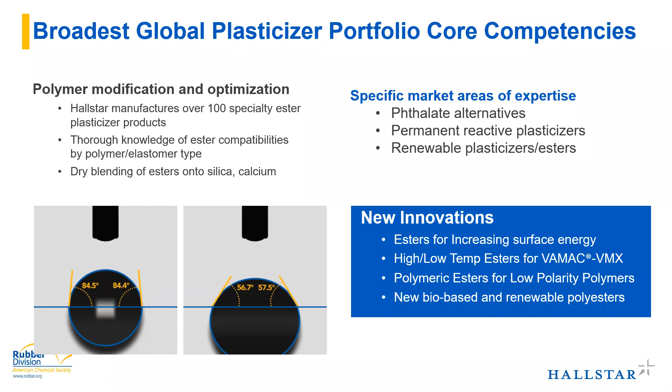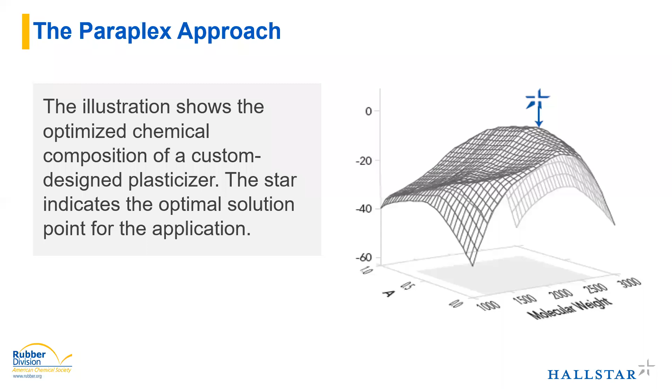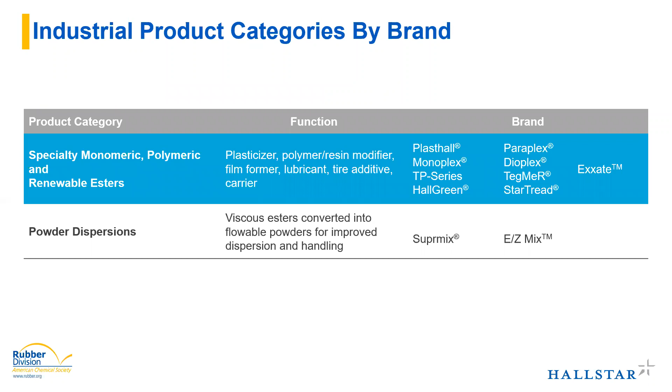And this chart just sorts some of our industrial products into chemistries, showing their functions and the corresponding brands that fall into these categories. This is just to give you an idea of the brand names at the core of our business, some of which will show up as examples in today's presentation. In the elastomer market, we serve various applications in automotive, oil and gas drilling seals, print rolls and blankets, conveyor belts, tires, and wire and cable industries. We have a long history in and have developed a lot of knowledge about elastomer modification.

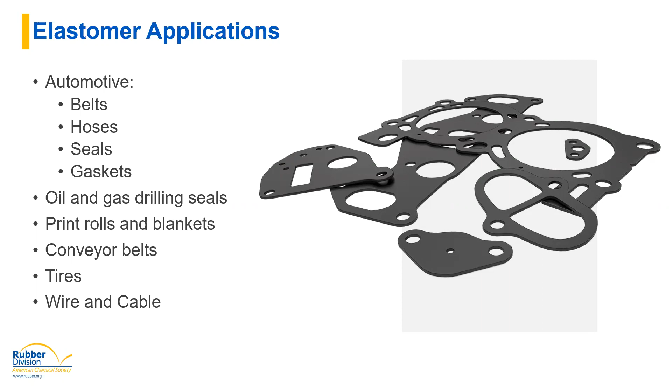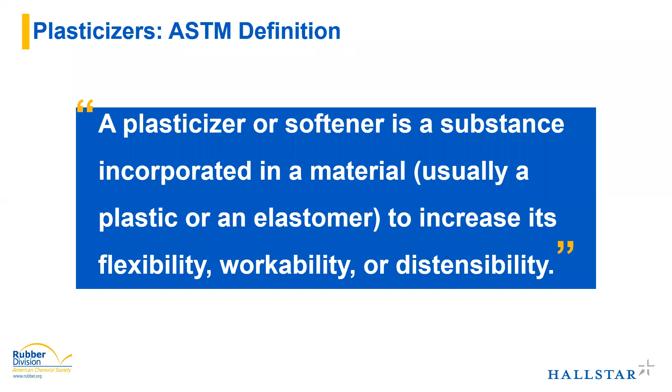So now it's time to get into the world of plasticizers. First of all, what is a plasticizer? ASTM defines a plasticizer as a substance incorporated into a material, usually a plastic or an elastomer, to increase its flexibility, workability, or distensibility. Plasticizers can function as process aids in low loading levels or compound property modifiers in higher loading levels. As process aids, they reduce the viscosity of the mixture for greater ease of processing in the form of lower temperatures and increased flow, as well as lubricating the mixture for cohesion of the uncured compound and reducing adhesion to both mill rolls and molds. Due to the low loading levels, however, they don't significantly alter the properties of the compound.

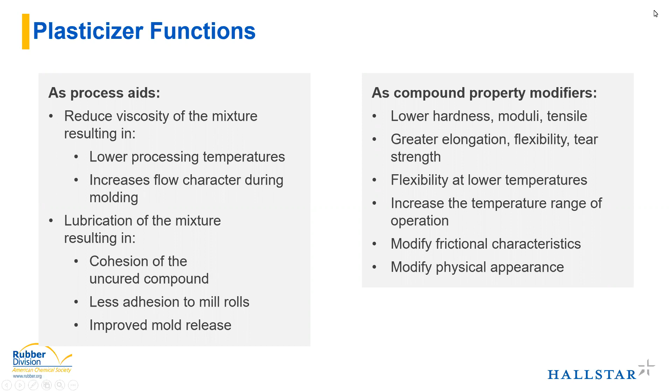However, as compound property modifiers, plasticizers improve upon various properties such as tensile, hardness and modulus, as well as flexibility, elongation, and tear strength. Furthermore, they enhance flexibility at low temperatures, increase overall temperature range of operation, modify friction, and can even change the physical appearance of the compound. So you may be wondering why we at Hallstar have a keen interest in ester plasticizers. Well, they provide distinct advantages to polymers, such as enhanced low temperature performance via depression of glass transition temperature, and also allow for improved processing and resistance to various fluids.

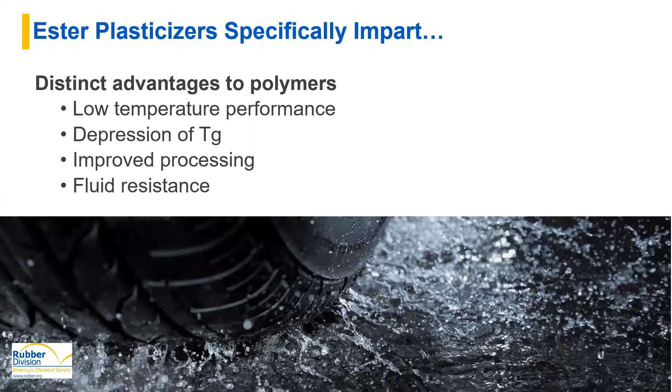Polymers are generally softer at high temperatures. This is because the polymer, when heated for a prolonged period of time, can break down and create lower molecular weight byproducts that act like plasticizers in the system. However, when heat is removed, the polymer modulus quickly recovers. So drawing off this concept, internal and external plasticization were invented in an attempt to retain the lower modulus of the polymer at lower temperatures.

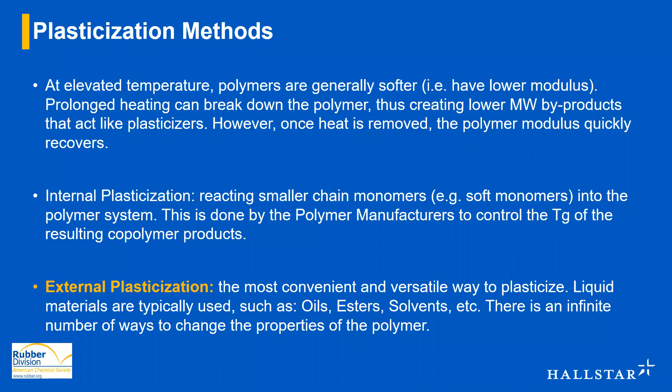Internal plasticization is not very common, but it does happen during polymer production, in which polymer producers chemically react plasticizers into the polymer chain to control the glass transition temperature of the resulting copolymer products. External plasticization, on the other hand, is much more common, as it's the most convenient and versatile method. This is when plasticizers, typically liquids like oils, solvents, etc., are added during the compounding process. This method allows for infinite ways to change the properties of the polymer.

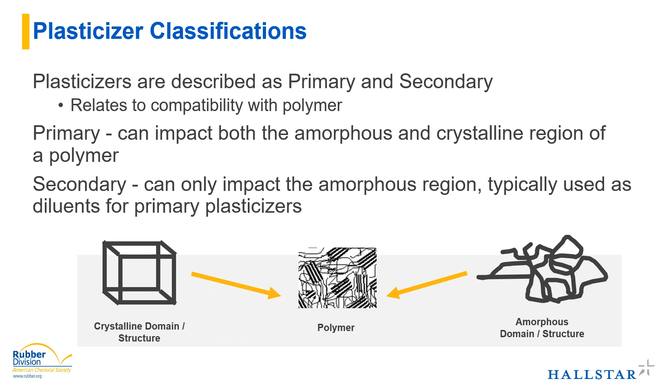So as you can see in the graphic below, polymers can contain both crystalline or ordered and amorphous or disordered regions, depending on how the chains pack together in space. The compatibility of a plasticizer with a polymer is impacted by the way the plasticizer fits into these regions, and this is what classifies plasticizers as primary or secondary, as you saw in the previous slide. A primary plasticizer can permeate both regions, while a secondary plasticizer can only impact the amorphous region of a polymer. Secondary plasticizers are typically used to dilute primary plasticizers in a formulation.

So now we know that plasticizers take up space in different regions of a polymer, but you are probably still wondering how they actually work. Well, there are four main plasticization theories. The first one, the lubricity theory, states that a plasticizer molecule acts as a lubricant between polymer chains. So as a polymer is flexed, the smaller plasticizer molecules glide back and forth between the chains. The second theory is known as the gel theory, which claims that plasticizers break up various gel sites in a polymer, or sites formed by a gel of weak attachments causing polymer stiffness.

The third and most widely accepted theory is the free volume theory. This states that plasticizers add more distance or free volume between the polymer chains, which accounts for the lowering of the glass transition temperature of the polymer. The mechanistic theory, the fourth theory, isn't really its own idea, but it kind of fuses and explains the other ones. This theory asserts that since polymers and plasticizers are not bound to one another, the plasticizer continues to move freely from one polymer location to the other, allowing for greater overall flexibility of the system.

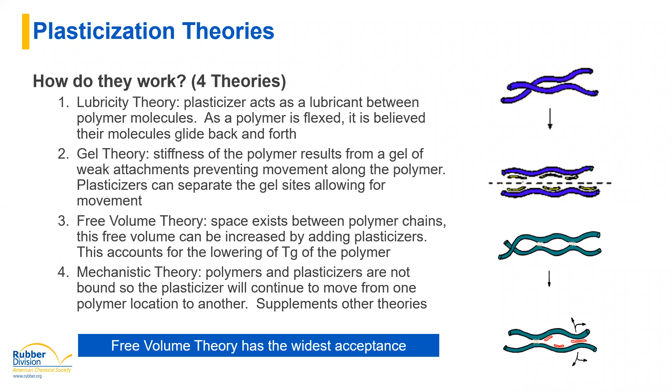So now that Dani's covered how plasticizers work, what their function is out in the world of polymers, how do you choose which plasticizer is the right one for your application? There are hundreds and hundreds of products out there, both ester and other types of plasticizers, and it can be a little overwhelming to try and figure out which is best for your application. There's a number of things to consider when you're looking and narrowing down your choices.

The number one thing that is the most important when deciding on your plasticizer is compatibility. If your plasticizer and your polymer are not compatible, the plasticizer will not stay in your polymer and will either bleed out or be extracted out over time, and you will lose any properties that you might have gotten by adding it in the first place. So that is really the biggest thing that needs to be considered before you look at anything else. Moving on from there, you can look at things like processing. Plasticizers many times improve or can reduce mixing time. They can help to lower viscosity of your overall compound for things like extrusion or injection molding. So that's another portion to consider.

Of course, just original physicals, your tensile properties of your modulus, your tensile strength, your elongation, all the way down to specific gravity of the compound or the compression set. Plasticizer can have an effect on all of those, and often that's your target that you're working towards. And then depending on your application, you may have requirements for heat aging or just long-term aging of the material and seeing how a plasticizer performs over time, and also resistances to fluids. If your compound is going to be exposed to anything in particular, especially for prolonged periods of time, you need to keep that in mind when you're selecting what type of plasticizer, because the plasticizer can really impact everything here.

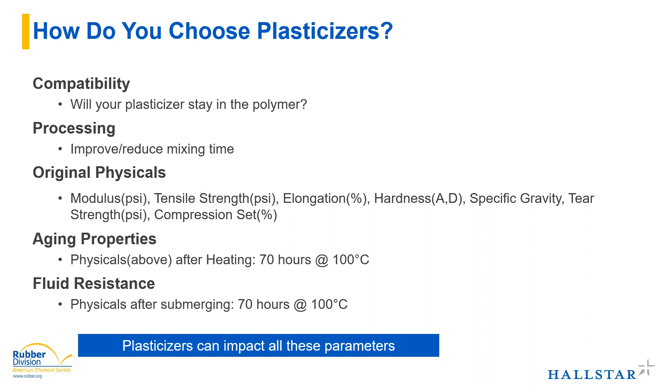So those are all things that you need to think about when deciding. I'm really going to talk a lot about compatibility because, as I said, that's really the most important thing that needs to be considered, at least at first. If your plasticizer and polymer compatibility is correct, then the materials will form a nice homogeneous mixture during the processing, after they're cured, at their resting temperature, and at the application temperatures, if that's different than room temperature.

It's only necessary, though, to have enough compatibility that it will remain in the polymer based on your desired product performance. You probably don't have to worry as much about having perfect homogeneous compatibility if your application is not going to be seeing extreme temperatures or is not going to be exposed to harsh solvents or other fluids that might extract it out. You don't necessarily have to have the exact same polarity between your plasticizer and your polymer to be considered compatible. A lot of other components in your compound could affect your compatibility, so polarity may not necessarily be exactly the same to get good compatibility.

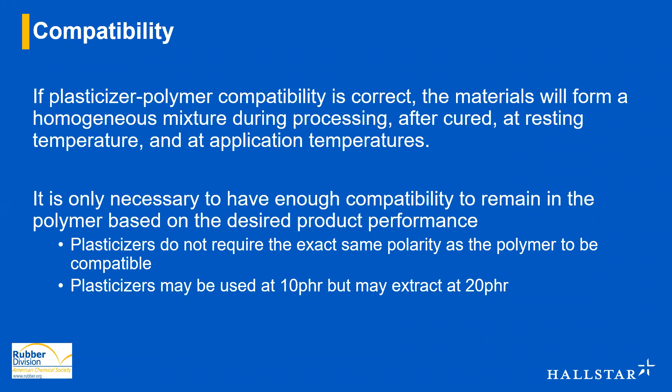And then the numbers given here for loading levels are a little arbitrary, but just to illustrate, plasticizers could also be used at a lower loading level of, say, 10 parts, but if you increase to 20 parts, you might be pushing past that compatibility threshold and you might start seeing extraction coming out. So loading level is also something to keep in mind when you're looking at compatibility.

Going even further, that's more of a relative qualitative guess while we're looking at these materials. But if you want something a little bit more quantitative, you can start looking at Hildebrand solubility parameters. Those are often calculated or tested and published for a lot of common elastomers, and maybe for a plasticizer class, not necessarily a specific plasticizer unless it's a very common commodity material, but you can at least estimate using those numbers. And then going even further, you can get into Small's constants, looking at additive methods of the actual atoms and molecules that are present.

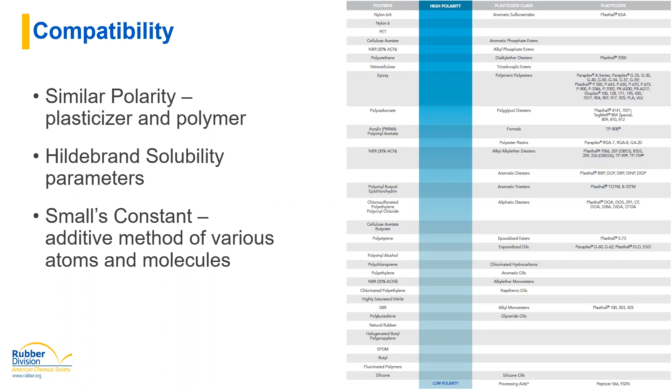Usually, you don't necessarily go that far when trying to decide on a plasticizer. It's a tool that's available, but usually looking at polarity or even solubility parameters is enough to guess at which materials would be the best for your compound, and you can go forward with testing, and usually trial and error is a more effective and efficient way of moving forward than calculating Small's constants, but it is a tool that's available out there.

So how do we calculate and look at polarity? First, if we look at an ester, because oxygen and carbon are the two most common atoms that are used in an ester plasticizer, we look at the carbon to oxygen ratio. There will always be oxygens present. That's what an ester is, that group of those two oxygen atoms in the molecule.

So by adjusting the number of carbons that we have in the molecule, we can adjust the polarity of the overall molecule. If we increase the carbon to oxygen ratio, shown here with the diundecyl on the left with a very long carbon chain versus the dibutyl on the right with a very short carbon chain, that increases your carbon to oxygen ratio and decreases the overall polarity of the ester. When you decrease polarity, you see a higher oil solubility.

Oils are very nonpolar, so as you decrease polarity of your ester, you'll see more solubility in oil. You'll also see a reduced volatility because the ester will always be present. As we decrease polarity, that means we're making the molecule larger, so it's going to be less volatile than a very small molecule like that on the right.

Converse to the higher oil solubility, you see reduced water solubility. Water is very polar, so as you decrease polarity, your ester will be less soluble in water. And then you usually see better low temperature flexibility as you decrease your polarity as well.

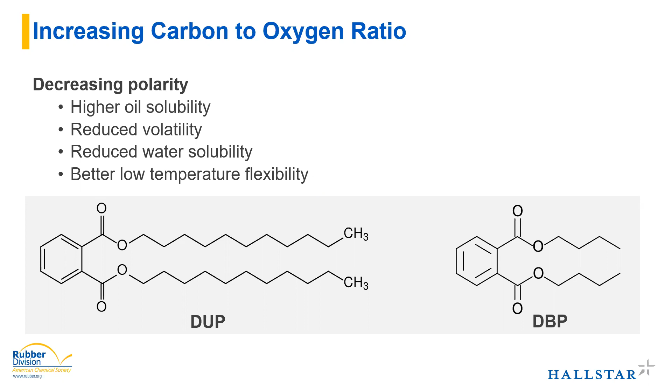Just to further illustrate how we calculate and estimate, we literally just count the carbons and oxygens present in the molecule and look at that number as a ratio. DBP with very short carbon chains only has 4 carbons present for every 2 oxygens. So we have that 2-to-1 ratio, and that's considered a high polarity material.

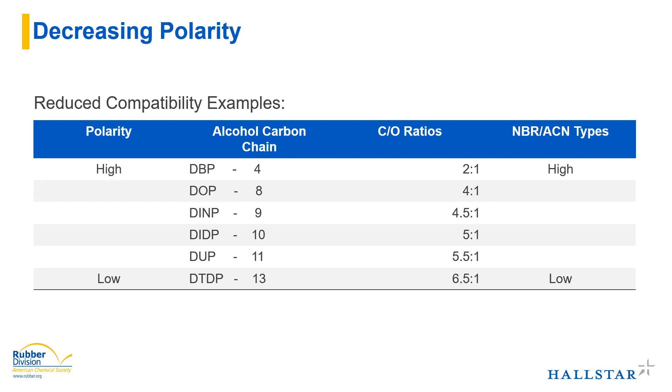Going all the way up to the tridecyl with the 13 carbons to every 2 oxygens, you're at a 6.5-to-1. That's a low polarity material with a high carbon to oxygen ratio. This takes a chunk out of that polarity chart that we showed before by putting these plasticizers in order of high to low polarity and showing that they would be compatible with a high polarity, high ACN content NBR versus the low ACN NBR or low polarity NBR.

And then just to illustrate with actual data, the changing of the carbon to oxygen ratio, the changing of the polarity, and their compatibility with an oil. The ASTM 901 oil is an extracting oil, so you usually see a weight loss over time after aging in this oil. And with the two first materials with a very high carbon to oxygen ratio, meaning very low polarity, you see an almost 10% weight loss.

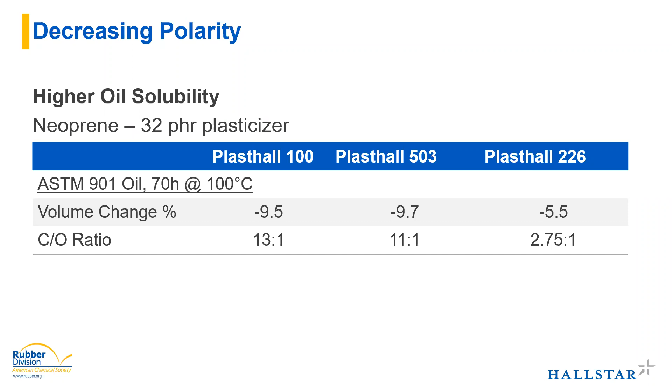Whereas with the material on the right, in a very low ratio, so high polarity, you see much less of a volume change, meaning that less has been extracted out because it's less compatible with the oil.

So how do we change all of these ratios? What materials can we use to play with that ratio of oxygen and carbon? This is just a piece of the materials that are available out there, but it gives you an idea of the broad availability that we have of materials to play with. From simple monofunctional alcohols, just like ethyl alcohol, up to butoxy, ethoxy with further functionality of oxygens to further adjust that polarity level.

And reacting with monobasic acids, just simple propyl acids, up to benzoic or linoleic and tall oils. And then we also use difunctional materials or glycols for difunctional acids or alcohols. Ethylene glycols up to hexane diols and dibasic acids from simple propionics up to phthalics or isophthalics.

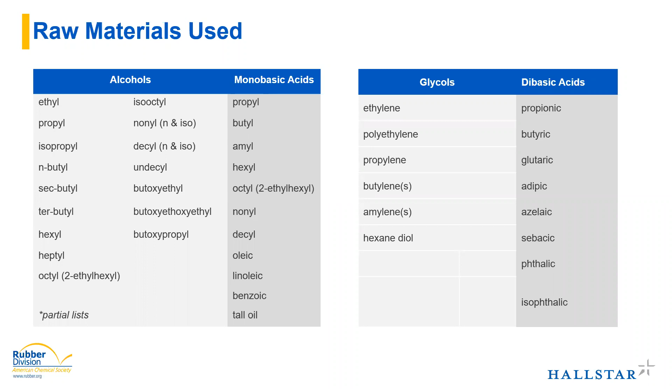To illustrate some of the most common acids that are currently used, really one of the biggest, most common materials right now is an adipate or adipic acid, as shown here. The phthalates used to be the most common, especially for monomerics, but as more and more governments are starting to regulate those materials, they're becoming less and less common. And one of the most common replacements for phthalic materials is adipates.

This is because it's relatively inexpensive compared to a lot of other acids out there, and you usually can get similar performance materials with adipates versus phthalates, and this is just what it looks like as a chemical structure. Azelates are another common material. They're more expensive and they're less polar, as you can see with the longer carbon chain between the acid groups. And glutarates are also a different option, slightly more polar than the adipates with having that shorter chain.

There's the phthalic, as I mentioned before. The reason that phthalics were a little bit more unique was because they had that aromatic ring coming off of the side, but they were very inexpensive, very effective plasticizers. Unfortunately now they're being regulated because of all of the hazards associated with them, so they are much, much less common, but this is what they look like. And finally, the sebacates have a nice long carbon chain, so these tend to be better choices for lower polarity materials, but again, they tend to be a bit more expensive.

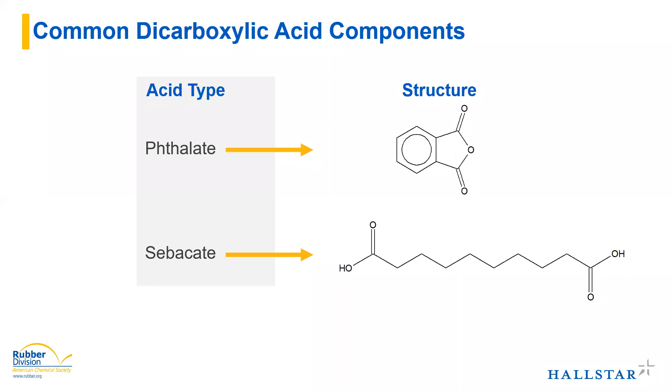So what are the effects of using different types of acids? They're usually separated into two basic groups. There's the aliphatics of long, straight carbon chains. So of the materials we just looked at, things like adipates, sebacates, succinates, glutarates, all of these that are just straight carbon chains. Versus the aromatics like a phthalate or a benzoate, a trimellitate. Those are more commonly used now, now that phthalates are moving away, but benzoates and trimellitates are still fairly widely used. So why would you use aliphatic versus aromatic?

Aliphatics tend to be very efficient at reducing their viscosity, so less material is needed to bring that viscosity down. They tend to have much better low temperature flexibility than aromatics. They also tend to have very good volatility resistance, especially for their size, and they have a wide range of compatibility, especially being able to adjust the length of that carbon chain between the two ester groups. You can usually customize your compatibility pretty well.

Aromatics, on the other hand, especially phthalates, were low cost, but some of the others can also be fairly low in cost. They give a good balance of properties. They may not necessarily be the best at low temperature flexibility or the best in one particular property, but they can give you a good balance across the board of good everything rather than excellent at one and really sacrificing in one other area.

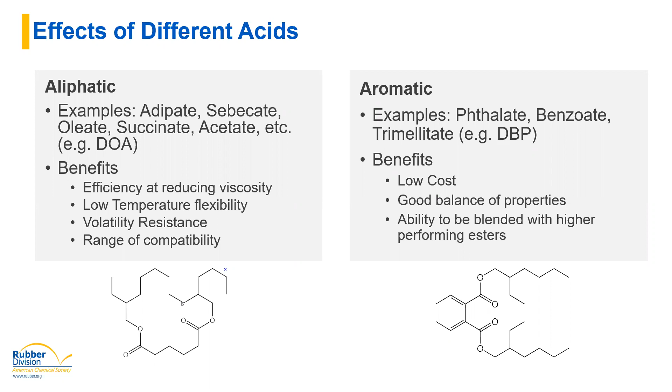And the other nice thing about aromatics is that you can blend them very well with higher performing esters. You might find an ester that solves all of your problems and does everything incredibly well because it's such a high performing material, but it's too expensive to actually be used practically. A lot of times aromatics can be used to kind of blend with those that give good compatibility and help to not dilute down the performance too much.

So those were the different acids. What can we do with alcohols when we're reacting with those acids to give these ester groups? The first thing that we can look at is carbon chain length. This is similar to the acids, but we can adjust the length of our chains coming off of the ester groups in the middle. A longer chain, such as in the DIDA, the diisodecyl adipate there, will give you an increased carbon to oxygen ratio, as we already discussed, decreasing your polarity. You'll get reduced volatility, being a larger molecule, better low temperature flexibility, but you'll often see poorer processability because it's such a large molecule compared to their smaller counterparts.

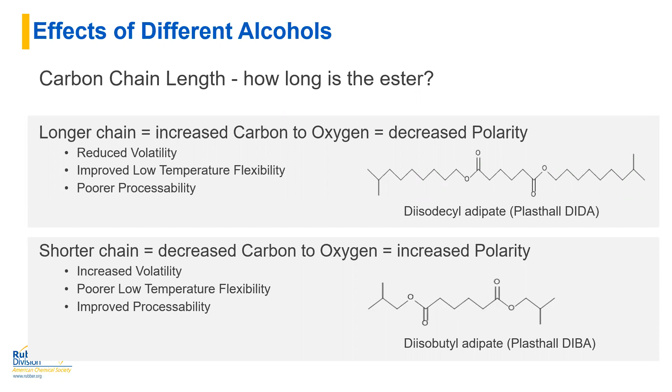With a shorter chain, like diisobutyl, which has a very short carbon chain coming off of the ester groups, you'll see an increased volatility since it's much smaller, worse low temperature than with the larger material, but you'll see an improved processability. The smaller molecule is able to move more freely. And the other thing to consider is branching. Branching can give some interesting effects on your material when you're processing.

The reason behind this is if you think of your polymer matrix as an entanglement of long chains, the more branches you have on your plasticizer, the less freely that plasticizer will be able to move between the chains because those branches get more entangled. That allows for less overall mobility, giving you worse low temperature flexibility than with a simple straight chain. You'll also see poorer oxidative stability. There's more sites in the molecule that are ready to be oxidized. So you'll see worse stability in that area.

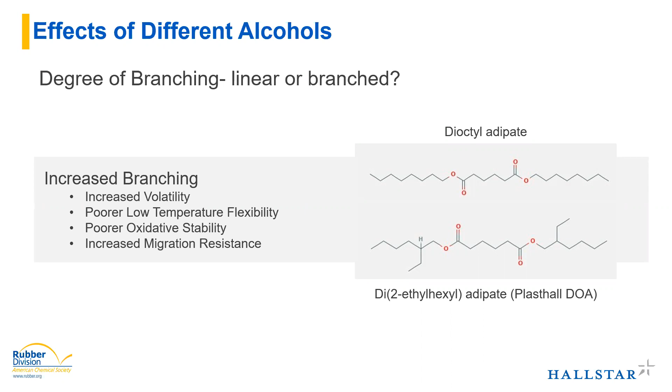But what it does for you is it helps to increase your migration resistance. Like I said, with the material being entangled in the polymer matrix, you won't see as much migration because your plasticizer won't be able to move as freely. So it's more likely to stay in your compound over time.

So we're going to take a short little break here because this is a course, and just do a quick little learning evaluation. Heather, I don't remember, should it be in the chat or in the Q&A function in Zoom? Sorry, if you can, I think it's in the Q&A. But if you can kind of hop in here and answer the question that we have, we got the chat. Okay, we have the chat over here.

So what is the single most important factor when we're selecting a plasticizer for your application? I'll give you a minute to answer.

So yes, I'll just jump back in here. It is compatibility. If there's one thing that you can take away from this course today, it's that you need to consider compatibility before anything else. Because if you just look at numbers and data and say, oh, this will be great, this will soften my material, and then you get it and it's not compatible, then it's obviously not going to work.

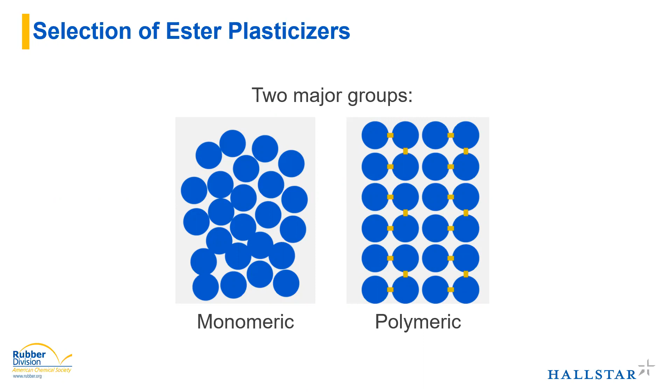Breaking those down even further, within monomerics, there's three main types. There's monoesters, which are not quite as common. They are used fairly widely, but not as widely as the other two types of monomerics. Monoesters typically have excellent efficiency. They are fairly small, and with only one ester group in the chain, are very good at softening even at lower loading levels. They also are typically used mostly in low polarity applications because they only have that one ester group. They're going to be more compatible with your low polarity elastomers.

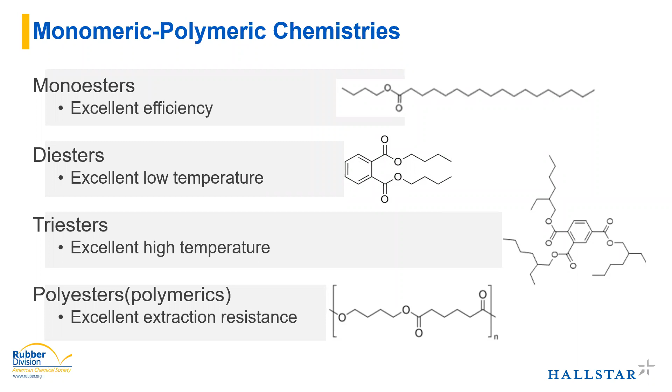Polymerics, polyesters can vary so widely that it's really difficult to group them into any further groups. So we really just leave them as polymerics, polyesters. And what they mostly offer is excellent extraction and migration resistance because they are so large.

So why would you choose one over the other? We'll talk about monomeric esters first. Monomeric esters provide excellent low temperature performance because they are such small molecules. They can move very freely and they can offer excellent flexibility. For the same reason, they have excellent plasticizing efficiency. You usually don't need to use them at very high loading levels to really see an effect and to see benefits. They're really well suited for more commodity elastomers, things like NBR, chloroprenes, and even PVC blends with elastomers as well. Monomeric esters do very well there.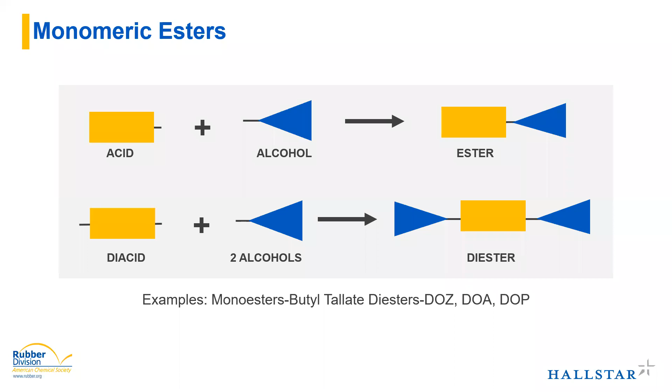Polymeric esters, on the other hand, give very low volatility because they are such large molecules in comparison to the monomeric esters. They have excellent extraction resistance to a wide variety of fluids because they are so large. They don't move as freely. And these are really especially suited for higher performing applications and elastomers. So similar to the monomerics, but also things like HNBR, polyacrylates, just the higher performing materials.

And then on the right side here, just to illustrate, because we have these nice repeating units, it gives us the freedom to terminate that polymer in an acid group. We can terminate in an alcohol group, or we can even leave the polymer chain unterminated to give that hydroxyl group on the end. And by having different end groups, we can impart different properties and different interactions with the final polymer.

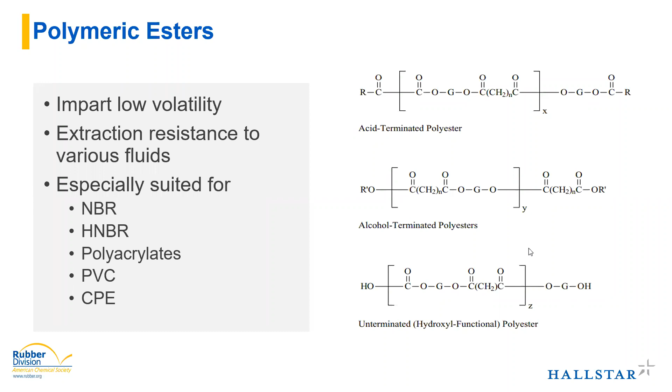So same pictorial illustration here. Similar to the diester, we use a diacid, but we also use a difunctional glycol so that we have the ability to make a nice long chain that keeps reacting with each other every other unit. We have an acid, then an alcohol, then an acid, then an alcohol, grouping together to give ester groups. Every one of those black lines is one ester group between each molecule to form one long molecule.

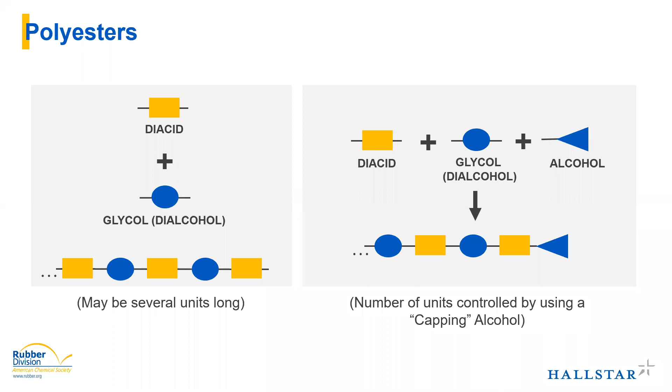On the right side here, it just shows with an alcohol, but this can also be done with the acid, that we can mostly have diacids and dialcohols or glycols, but we can also add a small amount of monofunctional alcohols to kind of cap that chain and stop it from reacting any further. And that gives us unique properties for the chemistry of the end caps of the chain, but it also helps us to control how long those polymer chains are by adding a certain number of those monoalcohols to not allow them to get any bigger. On the other side, we can not add those and allow the chains to just get as big as possible to really raise up that molecular weight, which can be really useful in certain applications.

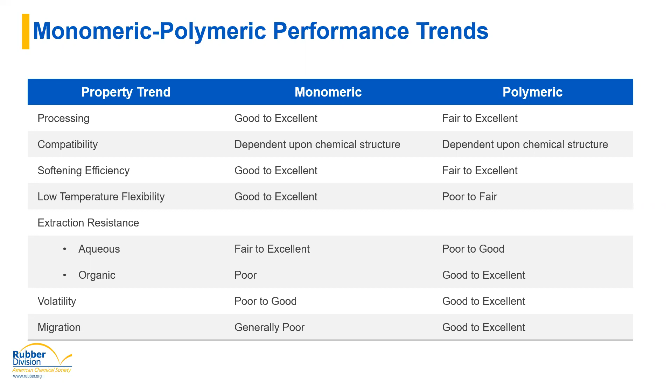Low temperature flexibility, as we saw in the previous slide, is almost always going to be much better with a monomeric versus a polymeric. And then extraction resistances. This one can also depend on the chemical structure as we talked about with adjusting the polarity. You might see better in an aqueous or an organic based on your polarity, but overall you tend to see better extraction resistance out of a polymeric than a monomeric. And then with volatility and migration, absolutely, polymerics are almost always much better than monomerics just because they are such large molecules.

So just to delve a little bit further, because we talked about the low temperature versus the high temperature performance of monomerics and polymerics, I just want to talk a little bit more because this is such a hot subject when people are talking about plasticizers. A lot of times people are using plasticizers to improve their low temperature performance. Or they're using plasticizers in high temperature applications and they need something that can withstand those high temperatures. So I'm going to talk about both right now, starting with the low temperature esters.

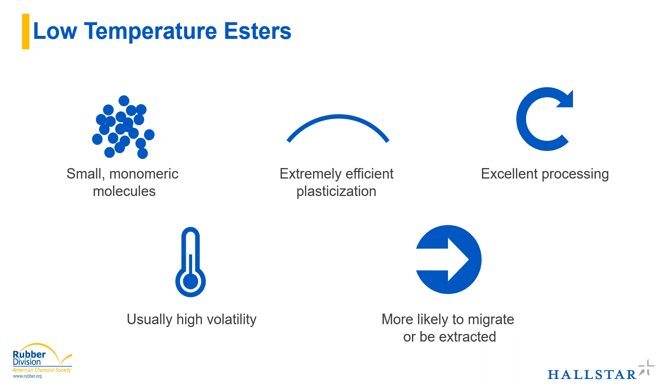So for something that is primarily designed for low temperature flexibility, you're talking about something that's going to be a small monomeric molecule on average. They're going to be extremely efficient at plasticizing, so usually not as much is needed to give good properties, and you'll see excellent processing because they provide that excellent flexibility. But on the other side, you see a lot of high volatility in these materials because they're so small, and they're much more likely to migrate or to be extracted out of your material.

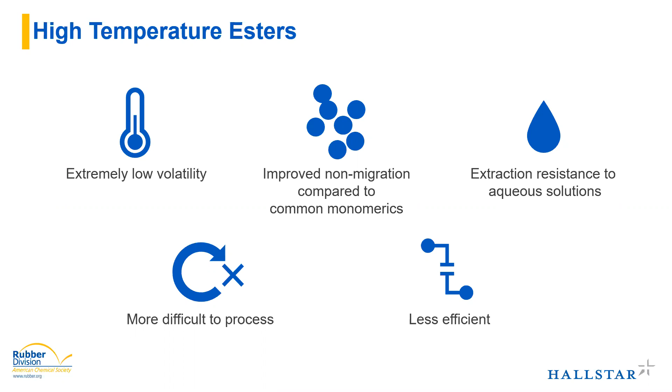And they also will have extraction resistance to a wide variety of solutions, but often to aqueous solutions. On the other side, again, you have your cons that they tend to be much more difficult to process, being larger molecules, and they're less efficient. So usually a higher loading is needed to get the same softening efficiency as a lower molecular weight material.

Common high temperature esters, typically, if you really want something high temperature, you're going to be looking at something polymeric. However, there are some monomeric materials if you're looking for something that's a little bit more of a balance, or if there is some reason that you really need to be using a monomeric versus a polymeric. Trimellitates tend to be the best, with TOTM being the most common high temperature monomeric ester. But really, if high temperature performance is the most important thing, polymerics are going to be the best bet.

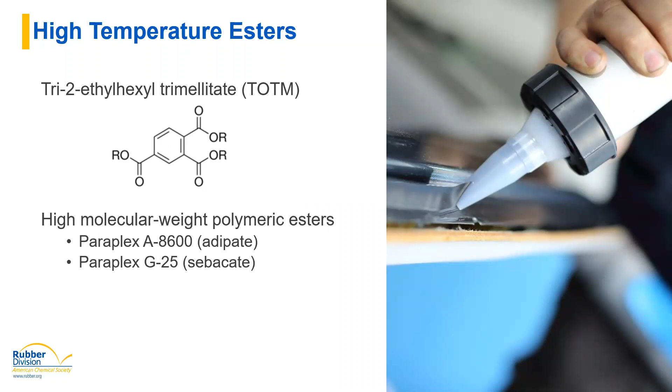This is just 2 examples of proprietary chemistries that Hallstar has. The A8600 is an adipate and the G25 is a sebacate, that are 2 of the highest molecular weight polymeric esters on the market, I believe, but definitely within our portfolio.

So we'll do another one of these quick little learning evaluations to kind of sum up everything that we talked about with the monomerics, the polymerics, high and low temperature, things like that. So we'll go back into the Q&A and select all that apply of these choices here, and which of them are the best performance benefits that you would receive from a monomeric plasticizer.

Yes, so first definitely would be efficiency. Monomerics are extremely efficient because of their small size, and low temperature is really one of the best ones. And then on the other side, which of these would be best with a polymeric plasticizer?

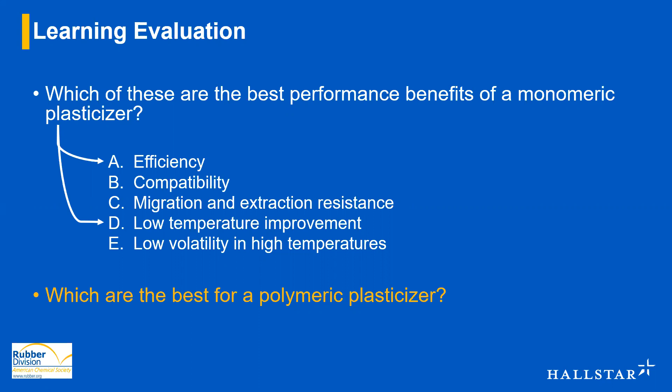Okay, yes, definitely migration and extraction resistance is always better with a polymer, and that low volatility in high temperatures. I included the compatibility here just to highlight one more time that monomeric versus polymeric does not affect compatibility very much at all.

Hold on. There we go.

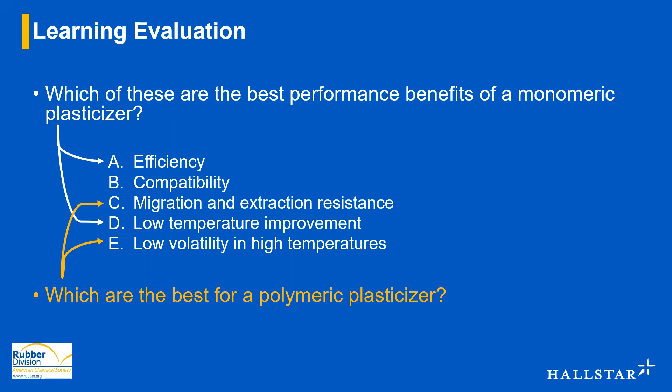So just to kind of sum up what we just talked about in that learning evaluation, but to help show monomeric versus polymeric and just in general ester chemistry solutions that can be provided for common concerns. On the left side in that compound property, we have different properties that are often a major concern when selecting a plasticizer for different applications. And in the middle, we have our ester chemistry solution of how we solve those problems or how we address those issues, and then some example products, both monomeric and polymeric typically, that could be used in each of these situations.

So first, for low temperature, mostly monomeric, but overall you can also use long linear carbon chains and just an overall low molecular weight. So the diesters, as we've talked about, but also low molecular weight polymerics can still give very good low temperature flexibility if you need a balance between that and some other property.

Low volatility when exposed to heat. We can use that high molecular weight, but another thing that I didn't really mention too much about when we were talking about raw materials, but it's something that we can do when we're synthesizing, is if we look at raw materials that have high boiling points to start with, that typically results in a higher boiling point ester and a lower volatility ester in the end. So typically monomerics, you're looking at things like TOTM, but really just large molecular weight polymerics are the best when looking at low volatility.

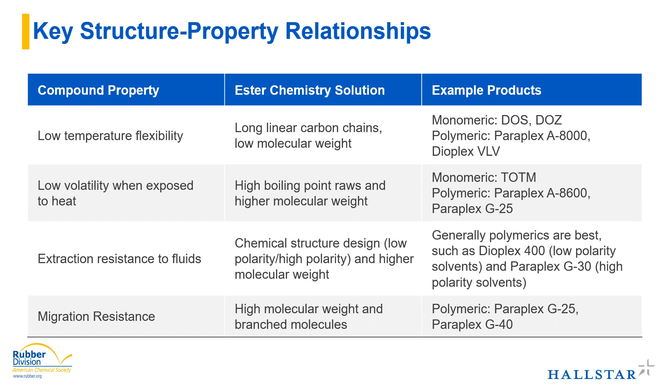So I'm going to talk a little bit through a few case studies just to give you an idea of some common problems that we've seen in the past and how esters have been able to solve these problems and how we were able to approach all of these.

This is a very simple, straightforward application here. It was an NBR printing roller, something that was transporting ink. They needed improved solvent extraction resistance from both the solvents in the ink, but also solvents that were being used to clean the rollers. They were having problems with the plasticizers extracting out over time and reducing the softening in these print rollers and making them much harder and more brittle and not performing up to their standards.

And using our Paraplex approach that Dani mentioned earlier in the material, we were able to use that DOE and help to optimize a product that both improved their solvent extraction resistance by 10% over the existing product that they were using, and it also ended up reducing the cost of their product by taking that into account as part of the DOE. That's something that can be added.

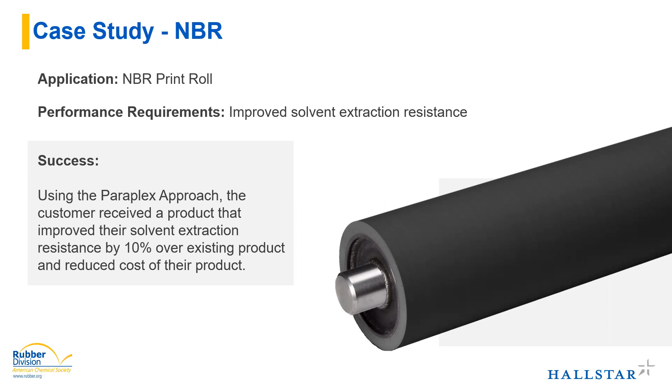Next was an HNBR powertrain belt. So this is like a really high performing part, something that's going to be exposed to 140 C at operating temperatures. It needed to have good oil resistance being under the hood, but it also needed to maintain good low temperature flexibility all the way down to -40. Automotive applications are tough in this regard, especially under the hood, because engines will run very hot, but then you also need to make sure that your car is starting in the middle of winter in the Midwest.

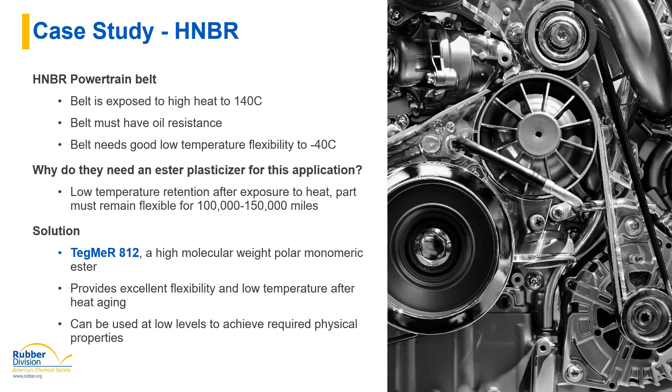The solution given here was a high molecular weight, polar monomeric ester. With it being polar and monomeric, we got some very good low temperature flexibility, but by increasing the molecular weight and making it a very large molecule, it helped to withstand those high temperatures and stay in the compound much better than if it was a very simple low molecular weight monomeric. It's giving that excellent flexibility and low temperature even after the heat aging, and it can also be used at fairly low levels. Because it's monomeric, it was more efficient than a polymeric would be to achieve those physical properties.

EPDM is always an interesting one because most people typically do not use esters in EPDM, but this was a unique application. This was an EPDM seal that was being used in downhole drilling. The first thing that we asked is why were they using EPDM instead of a higher performing elastomer like NBR or HNBR? In this, they needed something that could maintain flexibility with no cracks. It needed to swell in water and kerosene and not shrink because of plasticizer extraction. They were using a peroxide cure system to help improve the performance overall of the part versus a sulfur cure.

And the reason they were looking at an ester for EPDM: EPDM, for anyone who might not be as familiar, typically uses process oils as a plasticizer because they are extremely compatible in EPDM, being very, very low in polarity. But they're also very inexpensive, especially compared to an ester plasticizer.

EPDM in this application, though, typically swells for their water displacement, but in this, they also needed something that would retain at least some level of oil resistance. And process oils obviously will not be very resistant to oil because they're very, very similar in their chemical structure. So they wanted an ester to help offset that.

This was a difficult application to find a solution for, but we were actually able to offer them a reactive plasticizer, something that has some unsaturation in the backbone of the plasticizer. Now, this was only effective because of the fact that they were using a peroxide cure system. These types of plasticizers have not been shown to be very reactive in sulfur cure, but in peroxide cure, the peroxide can actually cross-link the plasticizer into the polymer network, just giving an even better resistance to any kind of extraction or migration because they've been chemically bonded to the actual elastomer.

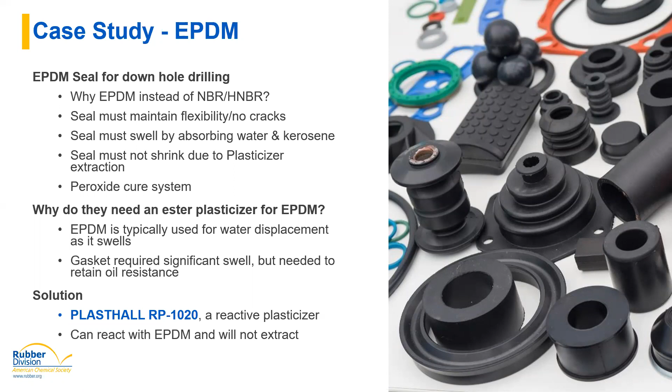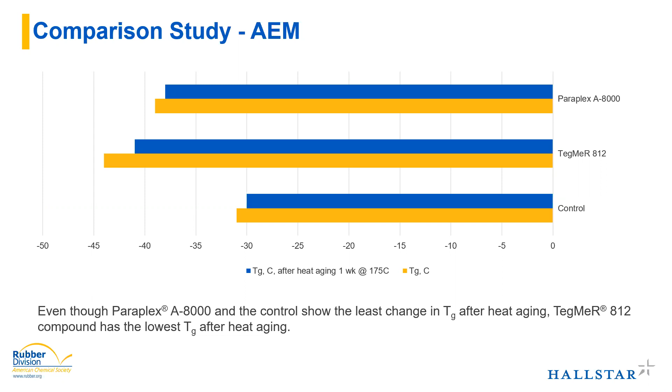But where we really saw the benefit here was in low temperature. The monomeric that we had mentioned before gave excellent initial low temperature, but also gave much better low temperature than even the initial low temp of the polymeric material. We didn't lose very much performance even after aging at a fairly high temperature in this acrylic. So it just shows how that high polarity, high molecular weight monomeric can give a good balance between the two properties.

So just to sum up, we have a long history in plasticizers, especially in ester and especially in the elastomer market. We have a wide range of experience in what we've worked with in the past and what we've been able to solve problems. We have combined decades of experience and over 100 different monomeric and polymeric products, a very wide range, and we love to help our customers.

I really hope that this course helped to give you a lot more knowledge moving forward with being able to select plasticizers yourself and being more knowledgeable about looking at the market and seeing what's available and what would work best in your application. But if you need further help, we love to help people with this kind of thing and to help educate you even more.